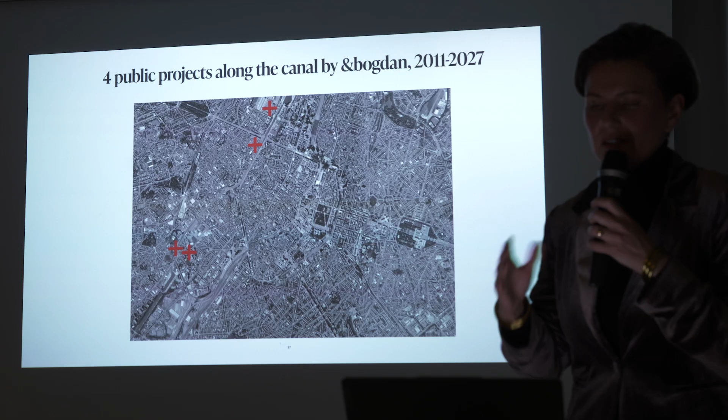We participated in many competitions and won 4 for public projects along this canal. If we won 4, imagine how many were organized—our best year was maybe 6 out of 10, which is unimaginable, a lot. The idea was: since 40% of the land along the canal is public, let's do strategic projects that trigger development, with a coherent vision, so they organized many public competitions.

One of these projects along the canal is Amal Amjahid, which was shortlisted for the EUmies Award in 2024. Belgium had a great performance that year—out of 26 shortlisted projects, we had way too many for the size of the country. We always compare ourselves to Spain, a much bigger country, so Belgium did very well.

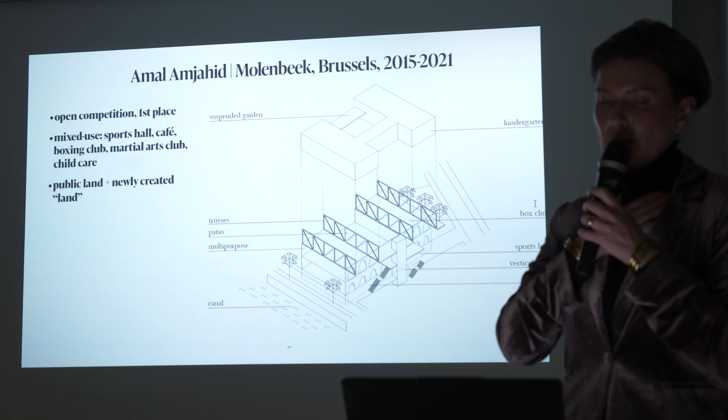What is this Amal Amjahid place? Exceptionally for us, it's a new building, but a very special one—we had a very limited height, a very small site, and a huge program: a sports hall, a cafe, a boxing club, a martial arts club, and two levels of childcare. It was a competition we won to put all these things together.

What we learned is that by stacking functions on top of each other, we can ease the pressure on land and create more open space elsewhere by compacting our program. The only challenge is then to design it all—finding ways, for instance, to create outside space for childcare, and to combine all these functions together.

This building is along the canal. Since then, many things changed, and the neighborhood changed as well—it looks a little alone on the side, but the context became a lot better. It's just a building along the canal with limited height, so we really had to compact everything. Like we always do, every project should add value to the city—it's part of the city, so we look at the city and then back at the project.

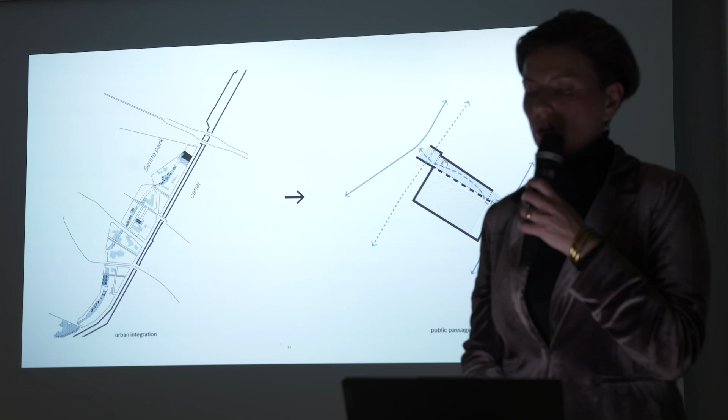Most of our projects don't have a back—they're organized as public passages, which is what we've done here. It works so well that the municipality of Molenbeek, the client, decided to put up a sign saying this is not a public passage, because people were crossing the building so much, which was the main point of the design. We designed this passage on multiple levels, also giving access to the childcare, which was one of the highlights of the project.

Also, you have to imagine the budget was extremely small. We did what we could with a limited budget.

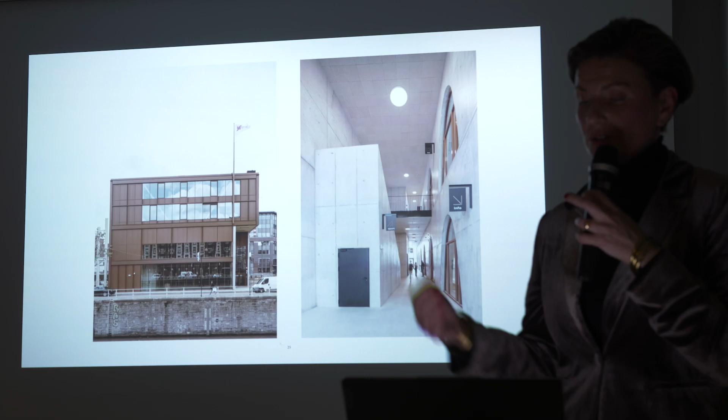So basically, the structure is also the finishing, and if there is anything, these arches play a structural role. This signage is also done as if it were a street, but we put a lot of care into it, again with a minimal budget, to make it a very respectful and dignifying space.

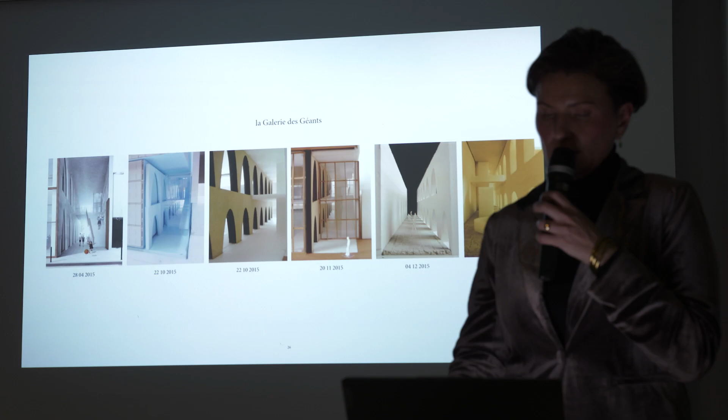We studied a lot to find the right way to organize this passage that was so important, and it worked very well. Then transparency, always trying to make very porous buildings so you can see through to the cafeteria in the sports hall. Everything we did was to have a very robust building with a very low threshold, where people could just linger around and go from one function to another.

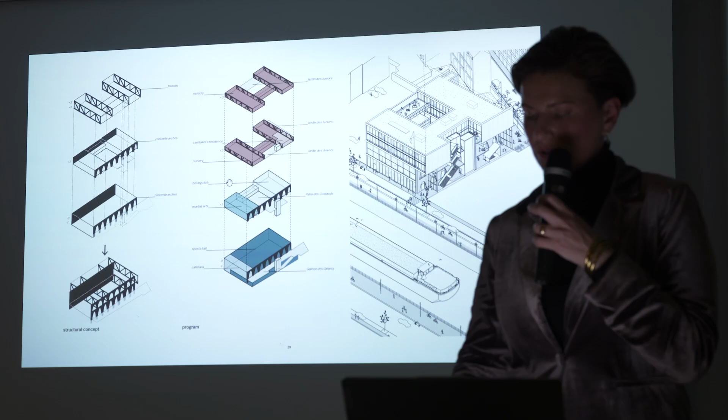As you can imagine, having a sports hall half sunken, half above ground requires a very special structure, because you can't have columns in the middle of the sports hall. So this was quite a challenge to organize the structure. The structure determined a lot of the project, and we worked together with a structural engineer from the beginning.

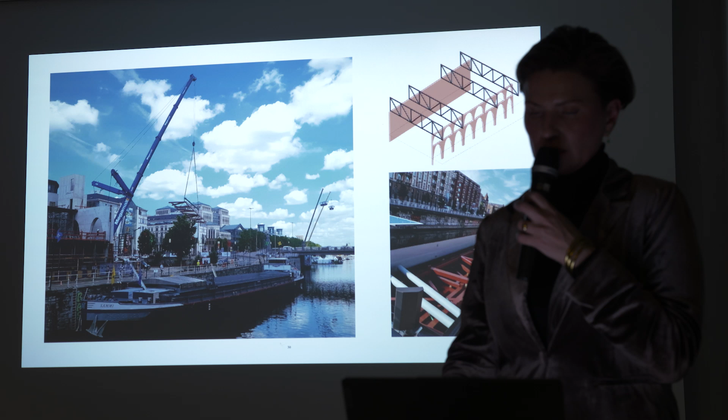The great thing is that we also managed to transport this structure, which is two levels high, on water from Charleroi, from the Wallonia region, by boat. It was quite an achievement, I have to say.

A lot of research went into the precise shape structurally of those arches, the openings in the wall, in one of the main supporting walls, and then a lot of research on how we can close this gallery without it looking closed.

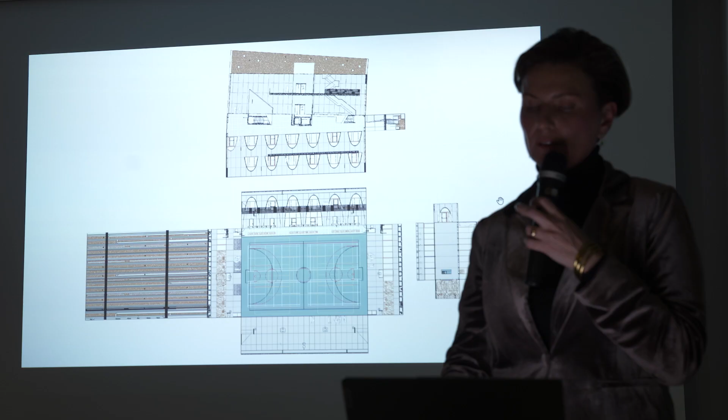So actually you cannot jump over it. There is a net, but this net was heavily researched so that nobody can cut it, and it's strong enough that everyone can still see very well inside the sports hall.

Modularity, as we all do. And then a lot of care went into this cafeteria, this cafe that would make the link between the city and the sports hall, where people could wait or watch a game in the sports hall.

It works quite well because you have families that come with children of different ages, and they all do different activities, and they all use this passage, which we always saw as an outside space or unheated space within the building.

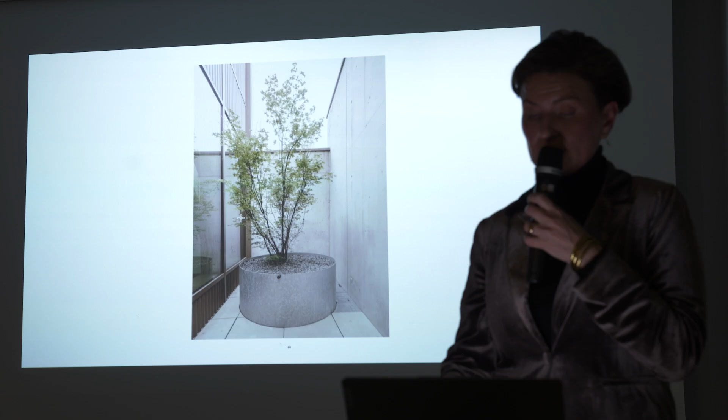So here we are on the highest level, for instance. It is a very special place. The name was chosen by the inhabitants of the municipality of Molenbeek, and it also has a social role. The vision of the center is that through sports, you de-radicalize youth, concentrating the energy on the right thing, like boxing or martial arts - this is the aim of this center.

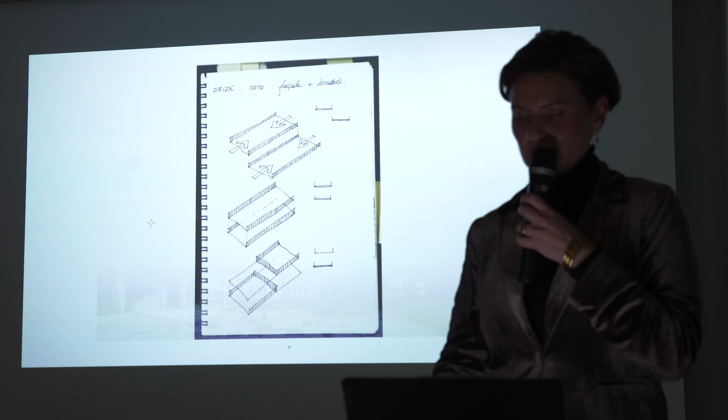And we had this idea to actually make a film, a movie about the structure. So this is not a movie about architecture, it's about the achievement of the people who have been working on this project.

That we like very much. And I leave you with this.